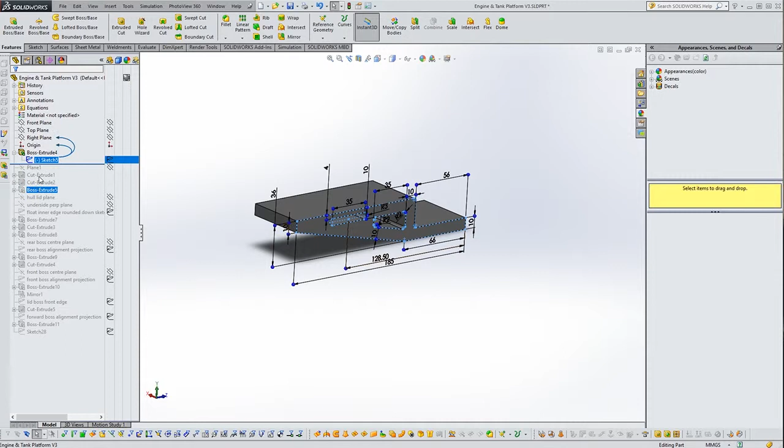Started out looking like this blue sketch here, which is essentially the overall shape of what will support the engine at the front here and the fuel tank around here. We have a cutout here for lightening purposes only, and we have a cutout here where we could put a little Velcro strap in to hold the tank down. Yeah, so that bit was fairly simple.

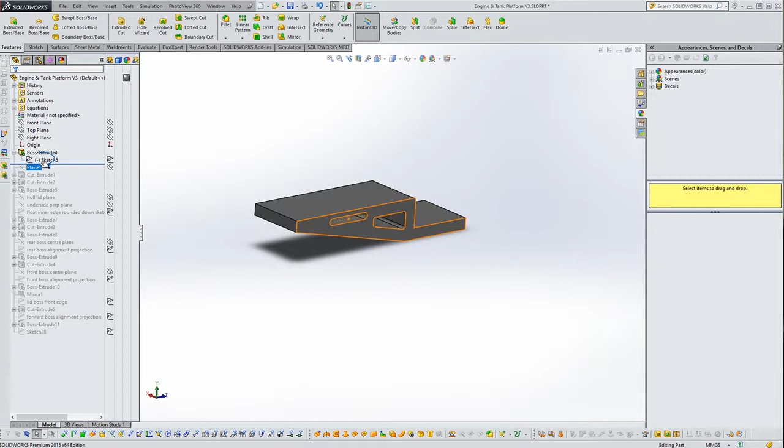If we move forward a bit, let's move forward to here. So basically what I've done is I've made a cutout at the front where the engine will sit in, and I've put the holes in that line up with the mounting holes on the engine's crankcase. I then did some little bits at the back here. The fuel tank's going to slot down inside that area there. And yeah, so that should all work.

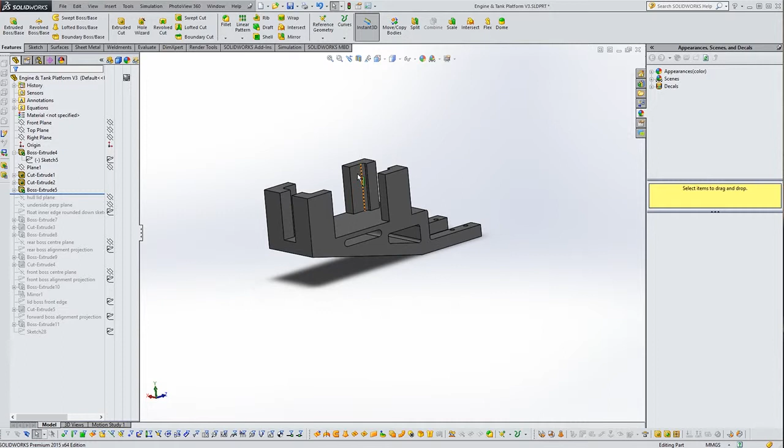Then what I did, let's have a look, where should we go to? Let's go to the end, I think that's a good place to go. So as you can see, I've now added some little structures to the bottom here with some hollow tubes in, which will accept aluminium round tubes, hollow tubes, which will push into there and will push into some kind of similar structure on the bottom. Yeah, like I said, the most complicated way of doing it probably.

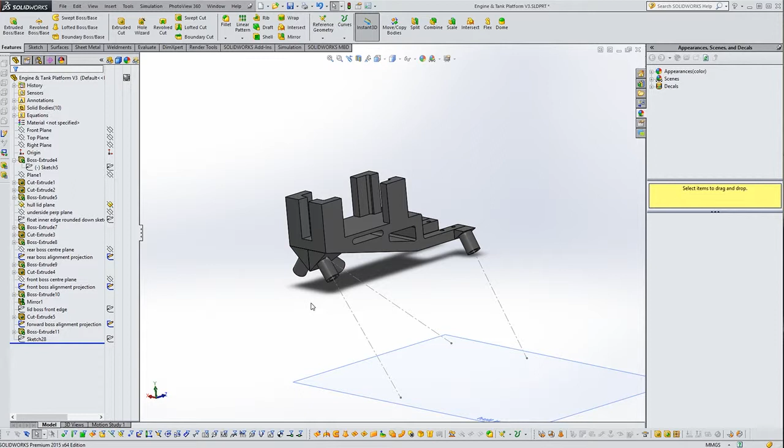Yeah, so let's have a little peruse around it. So we've got the two here. Basically, this is all going to be one thing, and it's going to be 3D printed. Very long story - I'm building a 3D printer, which will be covered in absolute painstaking detail on this very channel.

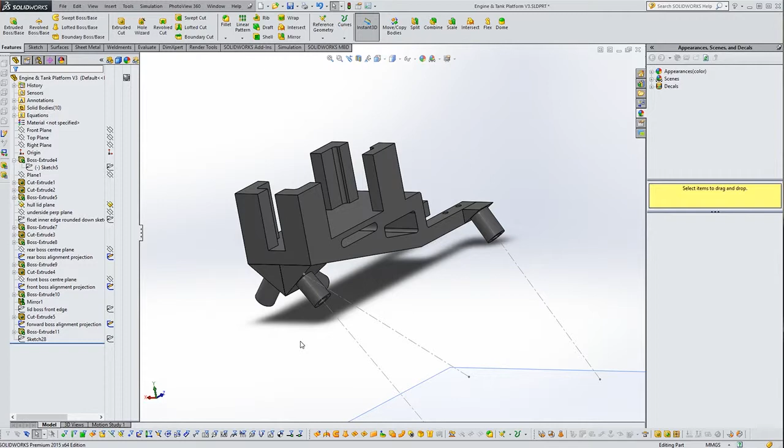So this is going to be one of the first items that I 3D print, and well, it probably couldn't really get any more difficult to 3D print because it's, well, yeah. Anyway, we'll get to that later.

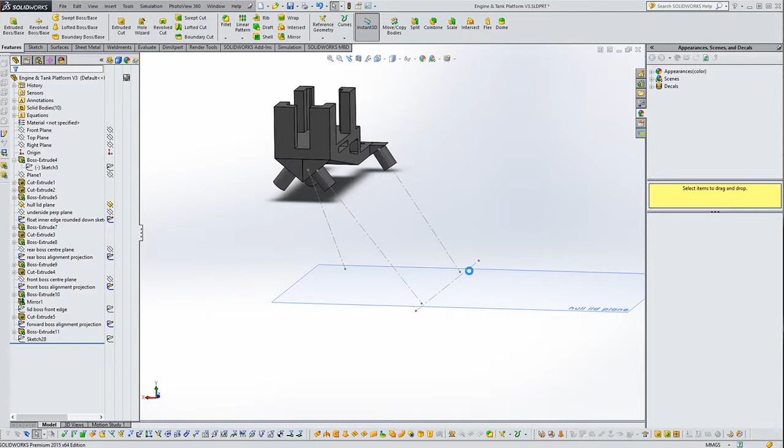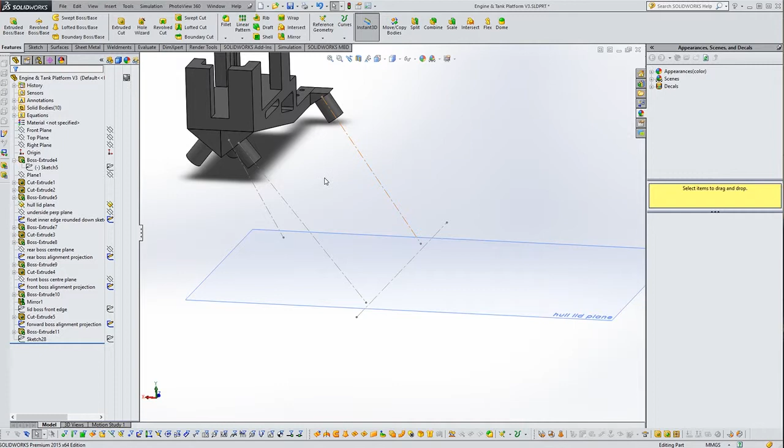Point being is that these angles here allow these tubes to point straight down at a point on the deck, and this is a simulation of how far away the hull lid will be. This line here is where the center of the hole ends, so I need these points to come down just inside of that, so I can put a structure down here that the other end of the aluminium tubes can go in. These angles are decided by the fact that that line needs to end up down here, and the same at the front, and then I've done a sort of front to back one.

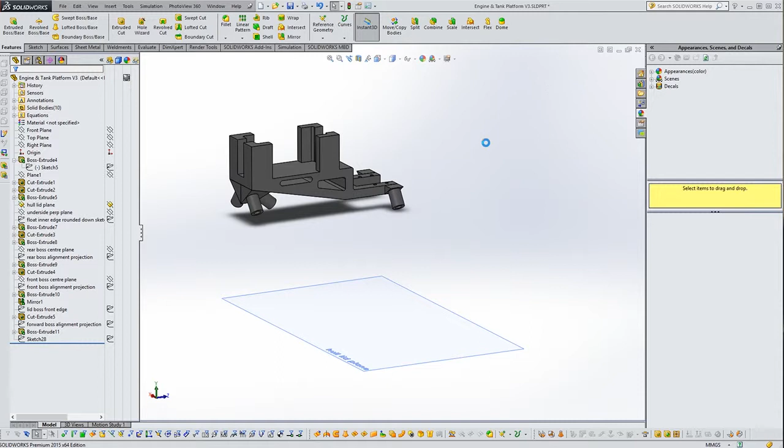That support there will stop the engine pulling itself off the boat and rather push the boat forward. So that's that kind of thing. Let's turn these sketches off. Oh my god, it's so slow. Actually, I've got a quicker way of doing this - let's just close it because we don't need to save it. Discard changes. Right, any minute now.

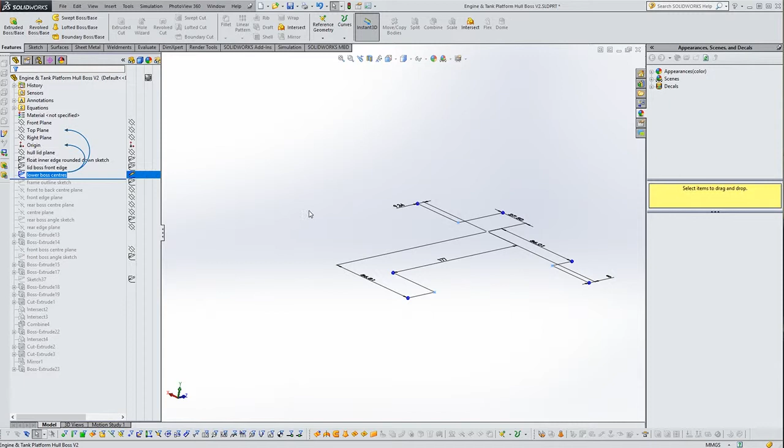Now that Solidworks has woken up from its slumber, I created a separate part for the bottom bit. Essentially what I've done here is I've mapped out exactly where these three points will be that the aluminium tubes need to meet up with. So very long story short, if I go all the way down to the bottom here, right to the end, you'll see what I came up with, and it's a bit of a beast, really.

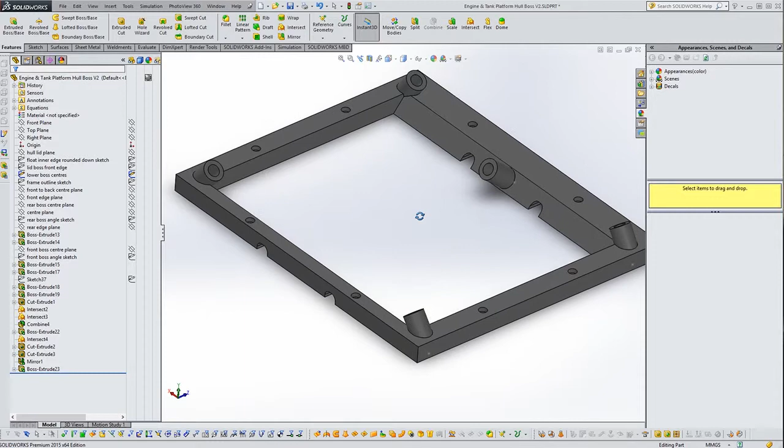So these are the tubes that the other ends go into, and some trickeries were that these need to be at the right angle as well at the bottom, and they need to be the right depth and all that kind of stuff.

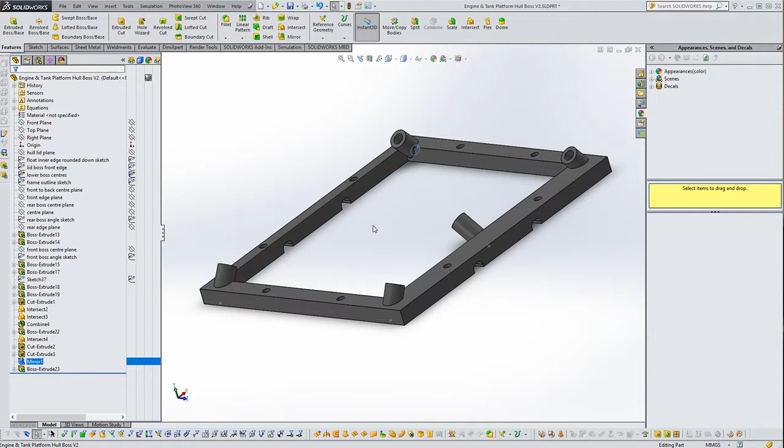Anyway, that's basically what we ended up with. And I've created some little bridges here, some little channels, which will basically just mean that any water that goes slop into here can run out, and that's all that's for. We've got some mounting holes here.

If I zoom in - ooh, we're going slow again. Okay, so there's some mounting holes, they'll take some hex cap screws, which will then sink down flush to mount it to the hull. So let's close that, let's not make any changes. Discard changes in assembly.

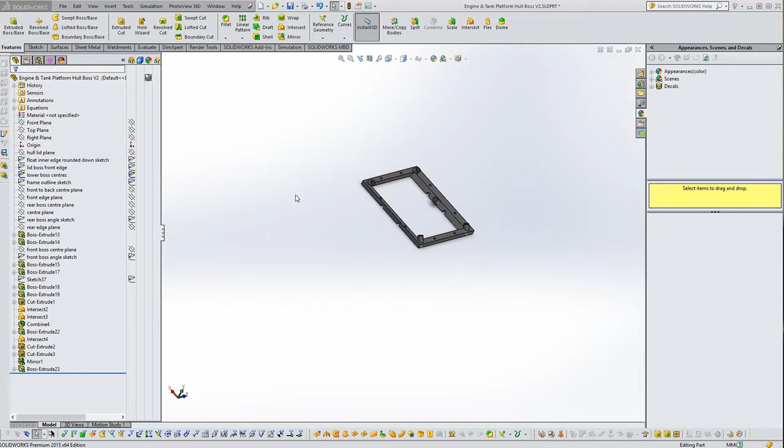And so it seems I am pushing the outer limits of my PC with all this stuff at the moment. But anyway, here we are, we're back where we started.

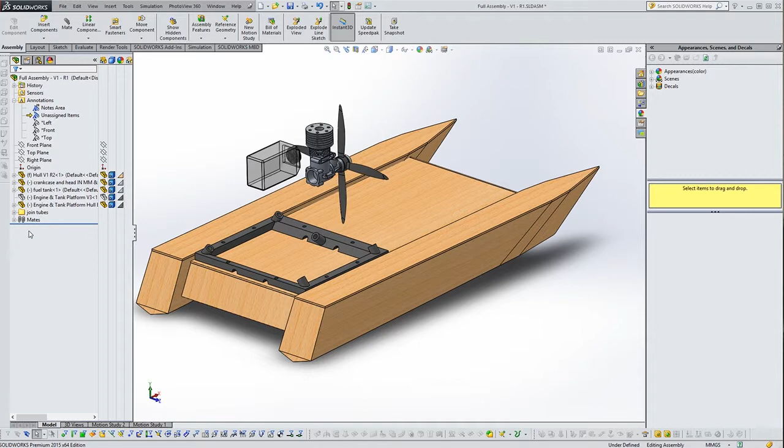So basically, first of all I did it the opposite way around, but I won't do it that way here - we'll do it in actual construction order. So we've got this bit that sort of goes to the bottom, and that screws to the deck, and that's there. We'll then have some aluminium tubes, which I can show here, which will basically just push into these holes. This bit will also be 3D printed, hopefully.

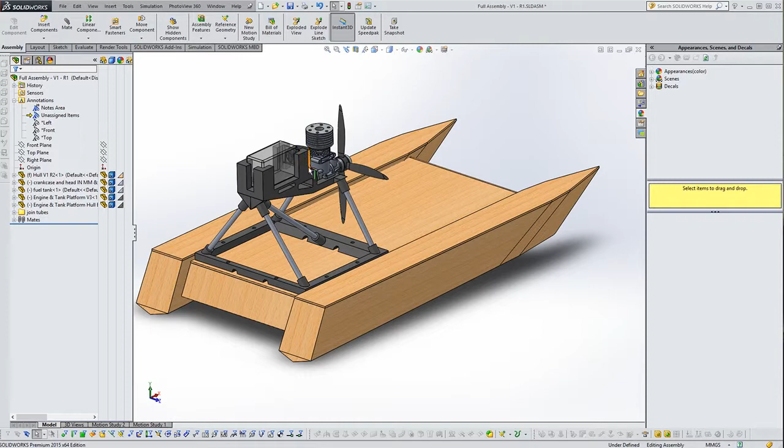And then lastly, we've got that top piece where that pushes onto those tubes, and I'll probably just glue it. And so then the engine bolts into there, where the holes are, and the tank sort of slots into there, and then we'll put a little Velcro strap around it. Yeah, that's my engine all mounted up and ready to go.

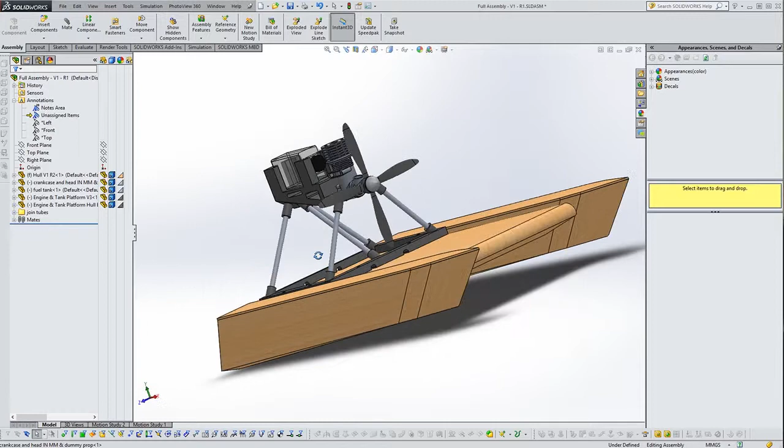So what have we got left to do? Well, I'm going to duct this because it's going to increase the efficiency of the propeller. It's going to provide more thrust for the same amount of propeller and speed and stuff. And then we need to deal with, well, we need to steer it I suppose. So yeah, going to put some steering stuff on there, bit of a throttle linkage. Yeah, that's where we're going next.